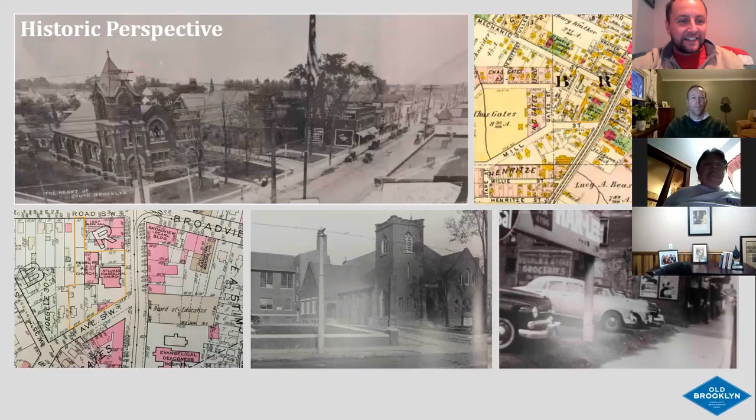The site didn't always look the way it did, and it's wonderful to kind of understand that layering and that history.

The church was abandoned immediately after Easter services in 2014. I have notes that connected us with the real estate broker for the United Church of Christ as early as September 2014, asking to walk through the property to begin redevelopment. The property at that point was listed on the market for well over $300,000. We probably toured about 36 different parties through the building, and you can see some of the types of developers and users that we toured through, and the challenges were identified as you could imagine.

There is no site access. The property is bounded by other properties and does not have access off of Pearl Road. To even bring in a bucket to start doing some painting and cleaning, you have to walk through someone else's property, which is obviously a challenge. The building was built well before the Americans with Disabilities Act and all the accommodations we now build into buildings and facilities, which will be a major challenge.

There is no poured foundation underneath the sanctuary. The sanctuary walls go into the dirt floor. Above the dirt floor there's a couple-inch air gap, and then there's a wood floor. So there's no foundation. If you wanted to put in a bar or a restaurant or any sort of retail use like that, the weight load on the floor could cause significant challenges for the building. And in addition, the sanctuary floor is sloped. If you've not been in the building, the floor is built on a slope going towards the altar.

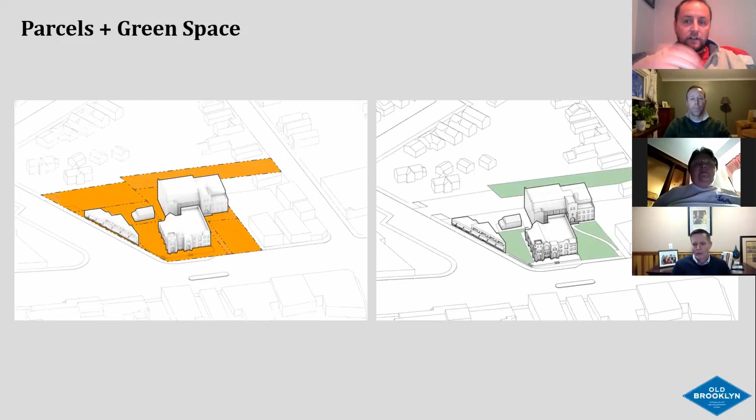So just an overview—I'm not sharing the entirety of the master plan, just a reminder of what we're looking at. You can see the various green spaces that exist in and around these properties, as well as the buildings around the properties. Obviously there are plenty of other buildings, but these are really the only things under consideration, because they're either properties OBCDC now has under its control or partner properties we're closely aligning our efforts with, such as the Pearl Road United Methodist Church, the beautiful church that sits back off of Pearl Road.

So when we went into this process over the last year, we had 3 goals. Number 1, secure the property. Number 2, evaluate the conditions of the property. Number 3, envision a future for that property. And I'm going to get into each of these details.

There were some concerns. The building was not secure and was vacant. What happens when you have an open vacant building—some things happen inside of it and to it that we wanted to address. Obviously, we wanted to understand the structural integrity of the building. How tight is the building? Are there water leaks? What's the condition of the systems? All of those pieces were evaluated in our master plan with the architecture office.

And then we wanted to imagine, what can we do? What can we do if we just have the St. Luke's Church? What do we do if we're able to partner with the Pearl Road United Methodist Church behind it? And then now, very recently, what could we do if we include the Greenline building at 3426 Memphis? But that's a very recent addition.

And I want to quick pause here and explain why from day one, Pearl Road United Methodist Church was a part of this conversation. It's largely for 3 reasons. Number 1, the roots of Old Brooklyn Community Development Corporation are in supporting the institutions of the neighborhood, in particular our faith-based institutions.

When we were founded in 1974, our code of regulations still say to this day we can only exist when we have residents, businesses, and institutions at the table. Unfortunately, as so many of us know, we've had a continued loss of faith-based institutions within Cleveland and within Old Brooklyn that are painful every time that happens.

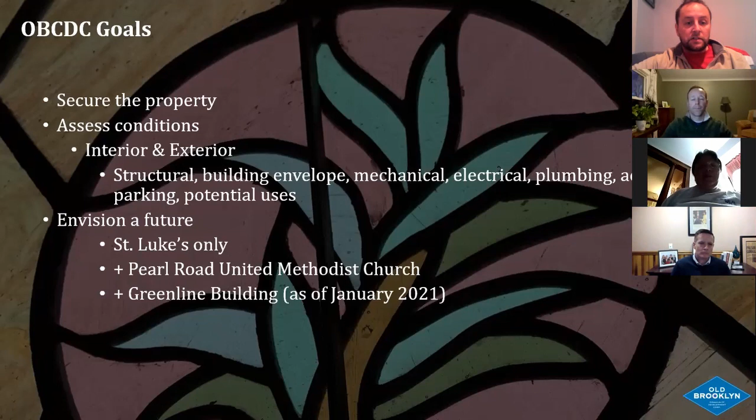And yet we know from our relationship that we've developed with Pastor Reif and his congregation over the last few years at PRUMC, the operations of that facility are challenging. It's a large building, it's an old building, it has major needs. And with the congregation's current ability, there are questions about PRUMC's viability. If you look on a map, there are not many United Methodist Churches anywhere between downtown and the far suburbs. So anything we can do to help out Pastor Reif and the community at PRUMC was paramount to our work from step one.

We engaged with the Sacred Landmarks Support Group of the Cleveland Restoration Society. This is probably the most expertise body on historic preservation of sacred structures within Northeast Ohio. So they had three different members of their group go through the building. One looked at just the masonry, one looked at the structure, kind of the carpentry if you will, and then one looked at the mechanical systems.

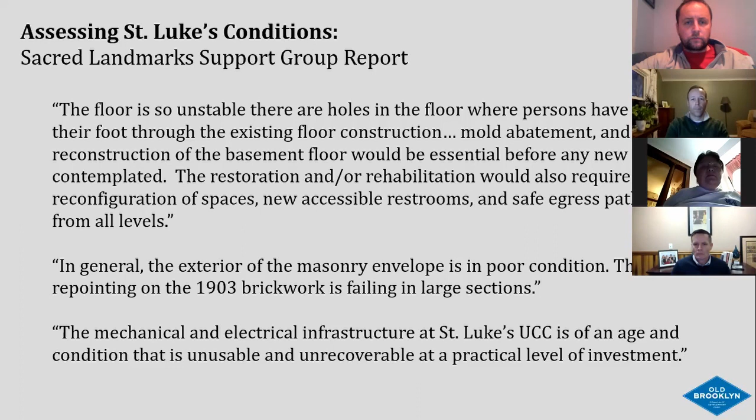They rated the building as being in poor condition. You can see some of these things - I won't read them there, but these were the stuff we identified as challenges. But to hear it from this group of historic preservationists was pretty sobering. So that was a key first step within our process.

So that is great. The third piece, in which we probably spent the most time over the last six months, is what does the future look like? Can we save the church? What could be built in it? What could be built in part of it? And then kind of what are the economics of restoring it, of razing part of it, of having to rebuild on the whole site, and then having deep conversations with our partners at Pearl Road United Methodist Church.

I can't say enough about Pastor Reif and the work he's doing, the trustees at that church, and one in particular, Tom Heitz, who has kept that building together with shoestring and dental floss, and he is a gift to this neighborhood, and we're so grateful that Tom's done such a great job with that. And so having conversations with the church about keeping worshiping at this corner, which is very important, easing the financial burden that they have, keeping the community gathering spaces. We've loved having that green space right in the center of the neighborhood for our community events, and then bringing life to Pearl Road right there in the neighborhood.

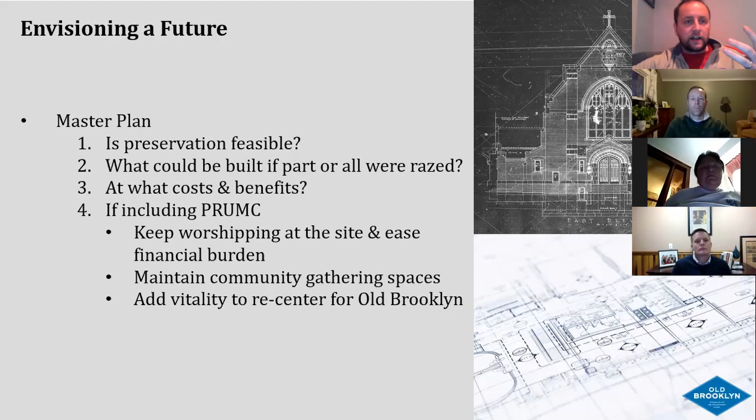So that's kind of our thought process for developing a master plan. And with that, we came to functionally four different scenarios that we want to share with you tonight and have a discussion with about what a future could look like on the site. We looked at 70, 80 different options. If there's an option you could think of, we looked at it.

Let's keep all the buildings. Let's keep none of the buildings. Let's keep some of the buildings. Let's put in a parking garage. Let's put in something below deck. Let's put in a community garden. Let's put in greenhouses. Let's put in a performing arts venue. All of the options we looked at.

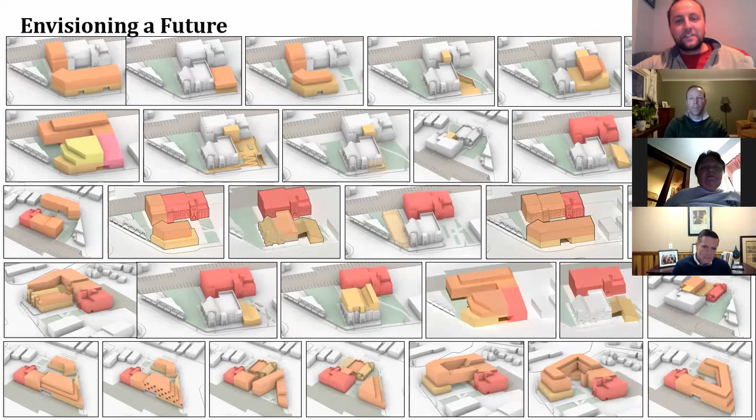So I'm just sharing you this screenshot to show you some of the options. These are not all the options we're obviously finally considering, but just to show you some of the ideas that we looked at. When we looked at these options, again, let me remind you, we wanted to look at how feasible these scenarios could be.

How likely would it be that businesses would go into these spaces? Can we address the challenge of the building not being accessible from Pearl Road? How financially feasible is the project? And then, as I mentioned earlier, those same questions apply to Pearl Road United Methodist Church. They were central to every part of our conversation because we want them to thrive for another 200 years on this corner, as they've been there for 200 years.

So first scenario: preservation of all the structures. This is the most straightforward option. It's a beautiful option that maintains all of the primary structures. We would be able to restore the church as previously identified, reinvest in the Greenline building, and keep the buildings as they are.

One area identified by preservationist architects is that the necessary ramping needed to meet ADA requirements could dramatically alter the Pearl Road facade of St. Luke's Church, and that's something to be aware of. Within the St. Luke's building, we could likely get 2 or 3 new businesses if we were to restore that complex. The challenge with this scenario is that OBCDC would probably need to raise $3 million out of a $6 million project, which is obviously a very significant undertaking to evaluate.

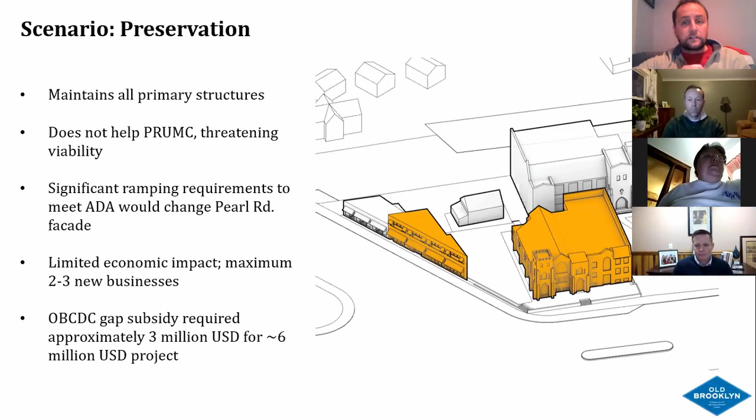But that is one scenario. Sometimes questions come up about what's inside the building. Here you can see the floor plans and what the uses are within each one.

The sanctuary itself is probably about 6,000 square feet or so - that's the sloped area. Then you have what we call the education annex, which is the northern half of the building, about 3,500 square feet or so, across 2 floors.

The basement is not usable right now, and would likely be very challenged to be used. I mentioned the lack of foundation before - because of that, and because the utilities haven't been addressed, I've actually had a staff member fall through the floor in the basement, since the conditions are so bad. There's also very significant black mold throughout the basement.

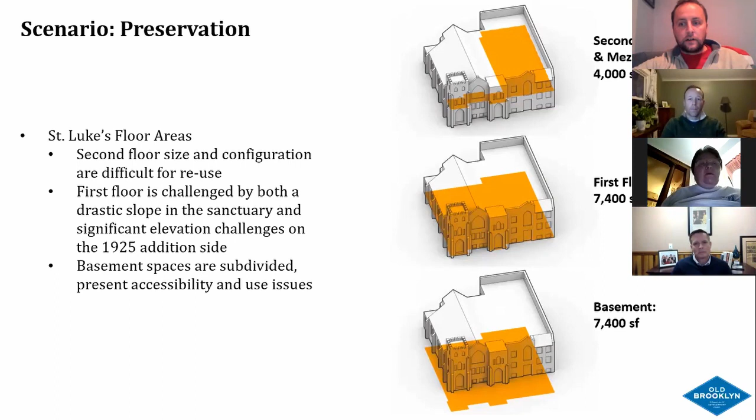A second scenario we want to look at is preservation of the existing buildings, combined with an accessibility solution for PRUMC. PRUMC does not have a good elevator, and we would need an elevator for St. Luke's Church. So what if we were to preserve the buildings but install an elevator that connects the two buildings? It's a really neat solution, incredibly creative, that allows us to kind of kill two birds with one stone.

Unfortunately, it still keeps the same challenges we identified before - we'd likely still have to do the ramping along Pearl Road, altering the facade of the building, and the significant financial gap for the project remains. It's a great solution to address the ADA issues, but it does not address the economic issues within the first scenario.

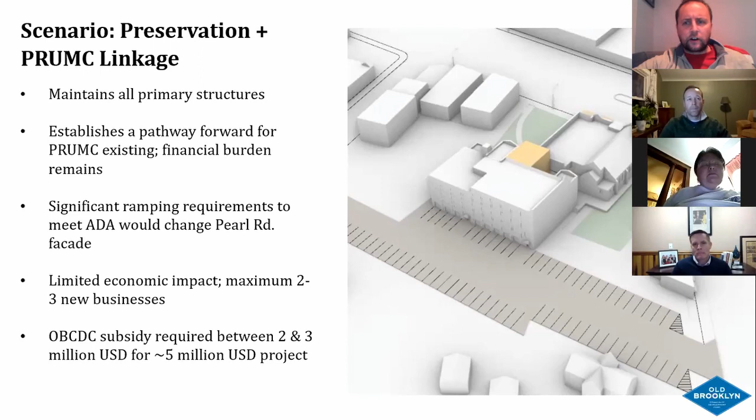So the next two scenarios are far more severe, and I want to tell you that as we get into them.

Scenario 3 could be a mixture of preservation and new construction. You can see in this scenario we maintain the St. Luke's Church, we maintain at least the facade if not much of the Greenline building, and we maintain the Pearl Road United Methodist Church. But I want to explain a few things you'll see here.

You'll see that the Pearl Road United Methodist Church is partially in red and partially in orange. The parts in red would be a newly rehabilitated home for the Pearl Road United Methodist Church. As the congregation has shared with us, the current building is too big for the needs of their congregation and their ability to maintain it.

Shrinking down to a smaller percentage of the structure while still maintaining the green space in front of them, as well as the visibility to Pearl Road, could be an ideal scenario for them to continue to worship on the site - alleviating some of the burden of the building while keeping their strong community vitality and connectivity on the site.

What you see in orange throughout most of the project would be a residential conversion. Some of that is a residential conversion of the historic structure within the St. Luke's Church. Some of that is new construction behind, perhaps above the Greenline building, and then potentially a part of the education annex of the St. Luke's Church.

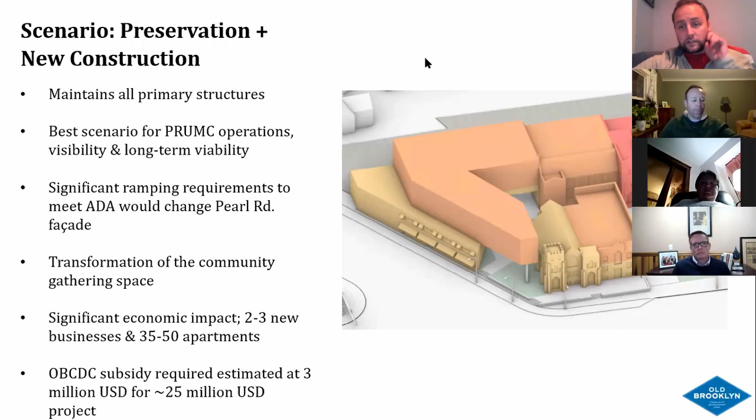So that's one scenario. And then the fourth scenario would be one in which we would seek a larger redevelopment and we'd have to face the unfortunate consequence of demolition at that point. So you see in this scenario, again, the red component is the Pearl Road United Methodist Church, shrunk down into a smaller portion of their existing footprint as in the previous scenario. Much of the rest of their building is then converted into housing. And then you can see that most of the rest of the corner is wrapped in new construction with retail below and housing above.

You can see in this scenario, we would have more new businesses and more apartments. And because of the lack of a need to subsidize the church restoration, that would be a project that likely would not require any extraneous subsidy by OBCDC for a project in probably a $25 to $30 million range.

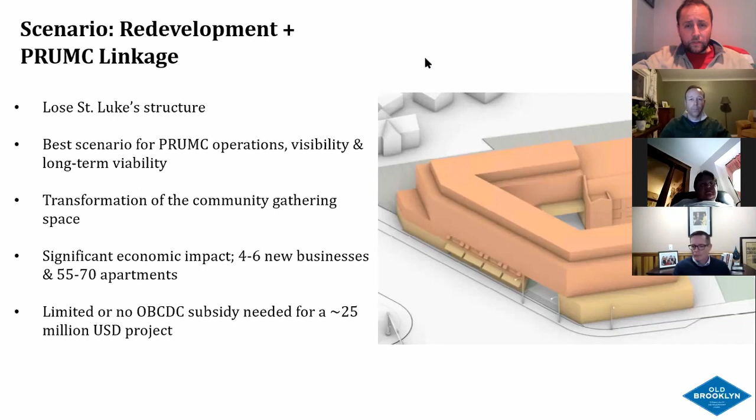So I have been talking a ton. I want to do a quick walkthrough of where we are, and then please, I want to stop and have a dialogue. Thank you all for listening. I want to hear feedback tonight.

We've taken this through OBCDC's real estate committee and finance committee and board. We've taken it through a small community stakeholders group. We've taken it individually to some longtime property owners and leaders within the neighborhood. This was our first chance, because this is such a new process, to share the larger ideas with the community and get feedback.

At that point, we will continue to deepen our partnership exploration with Pearl Road United Methodist Church, our most critical partner in this project, pursue adopting our master plan, which includes all of these scenarios with the city of Cleveland, and then go out and seek developers for options from historic preservation to new construction and everything in between.

There's a lot of interest in being in Old Brooklyn right now. We have a lot of great folks. I want to publicly thank John Young, who connected us with some terrific folks at Greater Cleveland Partnership and Cleveland Development Advisors, who've already connected us with some of the most prolific historic preservationists in Cleveland. So that is what we're going to spend the next 6 to 9 months doing.